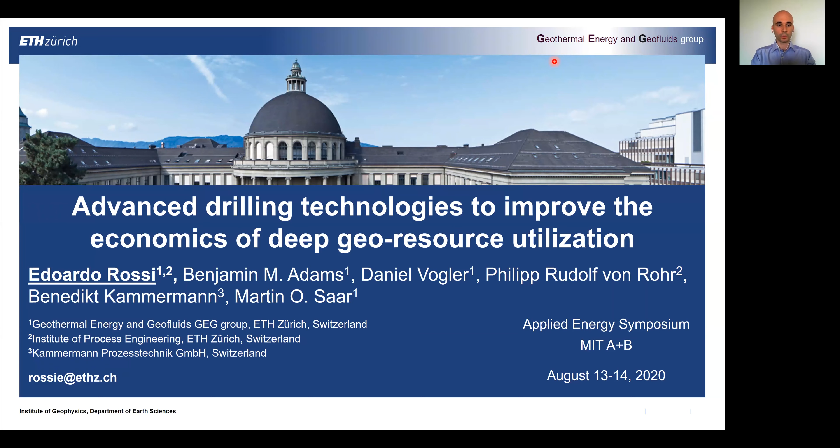Hello and welcome everyone. I'm Edoardo Rossi, and in this presentation I'm going to show you our work on two advanced drilling technologies to improve the economics of deep geo-resources.

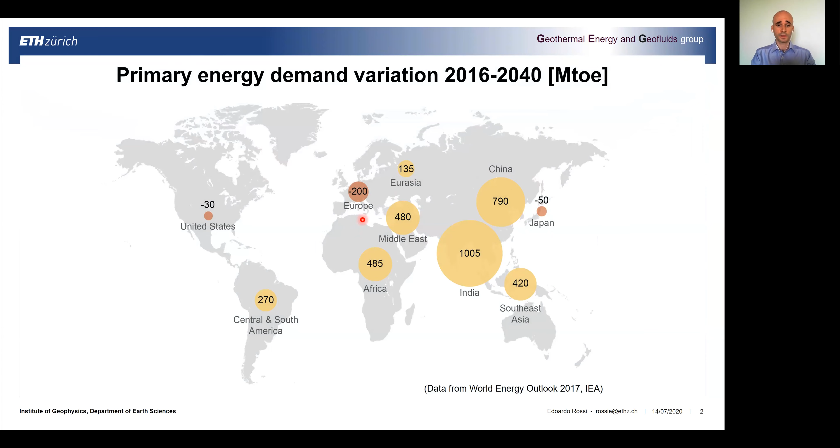Let's start from the background of this research. Looking at the primary energy demand variation in the next 20 years, we can see data from the International Energy Agency showing how, in some developing areas and due to increased world population, there will be an important increase in the energy demanded in the next 20 years.

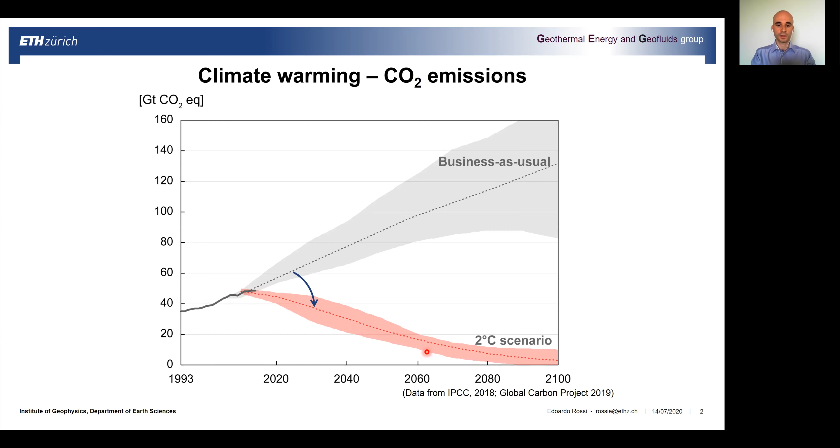Also, a current concern is climate warming. Looking at CO2 emissions, we can see the 2°C scenario from IPCC. If we want to follow this 2°C scenario, we need to decrease our CO2 emissions in the atmosphere and go towards a zero value by 2100.

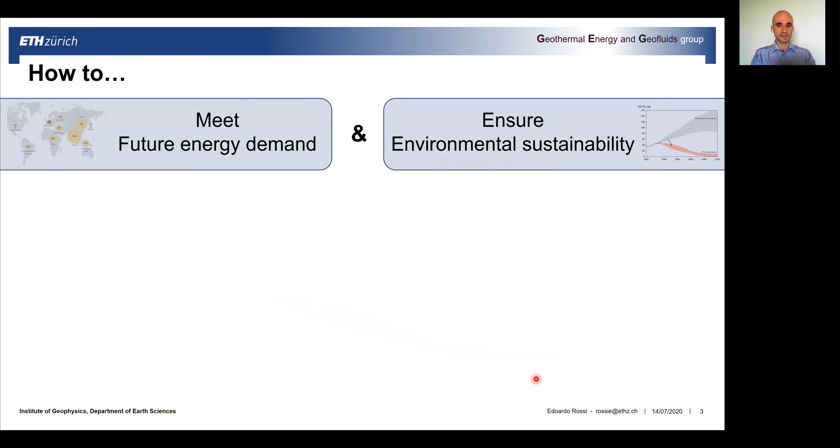If we want to combine and couple these two issues, we understand that we need to find a solution that can increase our future energy supply and at the same time ensure environmental sustainability. Therefore, many countries around the world are proposing and applying energy transition strategies, looking at producing this increased energy generation using renewable energy sources.

Looking at conventional renewable energy sources such as wind, hydropower, and solar energy, there is a huge problem regarding their location and temporal dependency. We cannot produce from these energy sources all around the world, and they also show a short to long-term temporal dependency.

On the other hand, deep geothermal energy, which means using the huge amount of heat stored in the underground of our planet to produce electricity, could provide an interesting solution to increase our future energy supply while also being environmentally friendly.

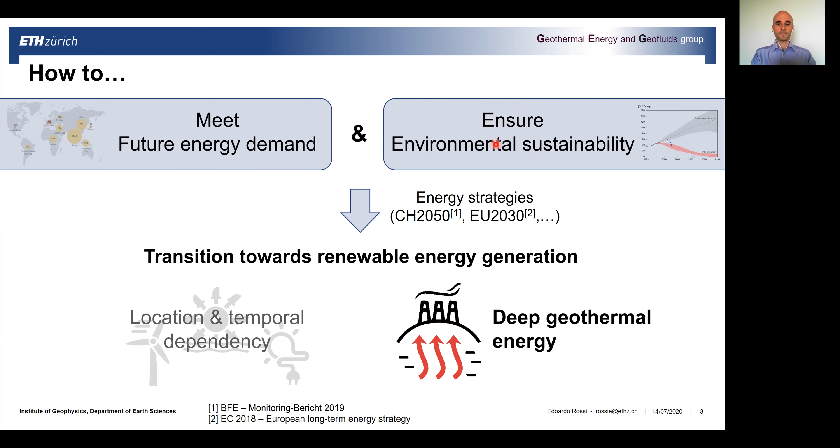One of the most interesting systems using deep geothermal energy is enhanced geothermal systems, or EGS. This system uses the heat found at depths larger than 3 kilometers, generally in low permeability basement rocks such as granite, by circulating a fluid through a hydraulically stimulated or fractured network to extract this heat and, at the surface, produce electricity and/or heat.

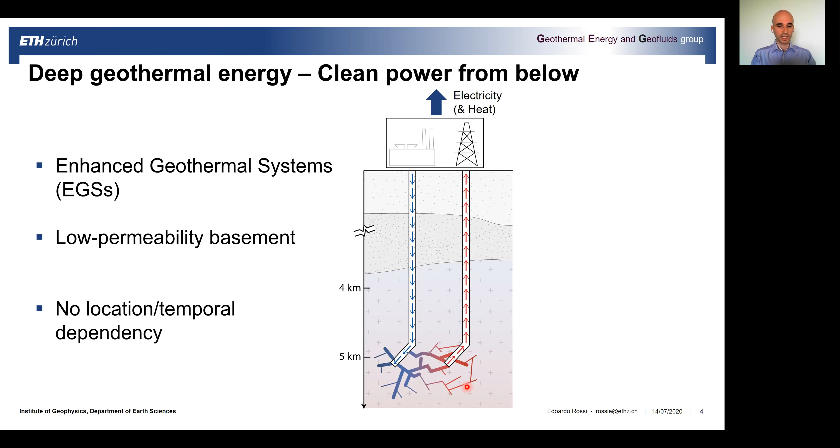Therefore, these systems show no location dependency. As soon as we can construct these deep wells, we can have these systems everywhere in the world, and there is also no temporal dependency. So this system can provide baseload and dispatchable, on-demand power.

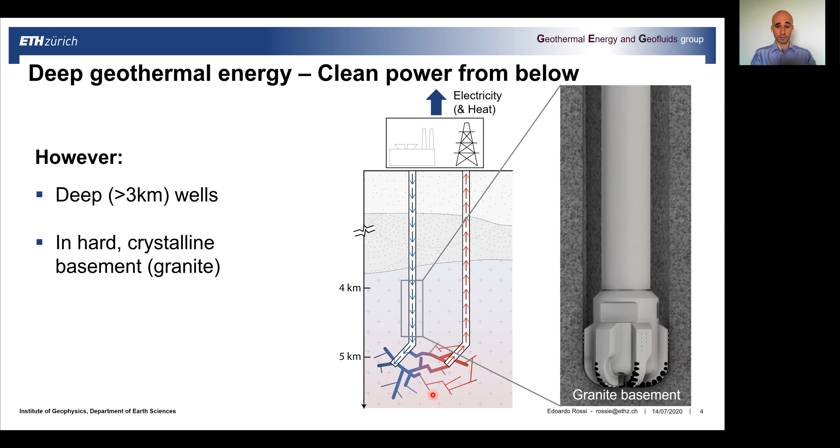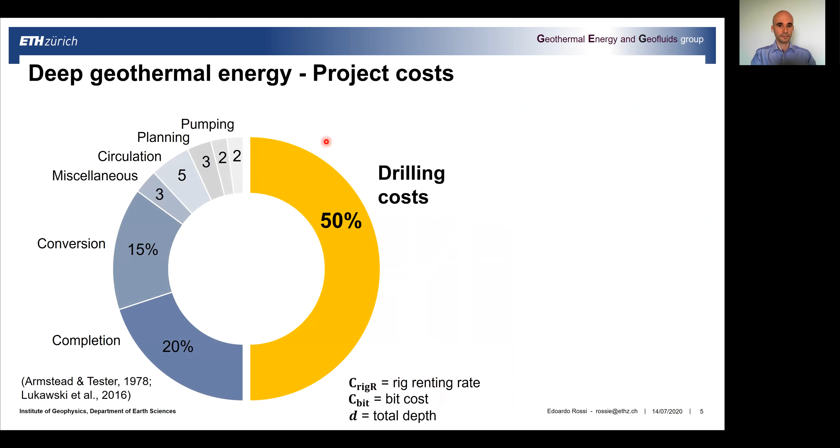However, one of the main challenges of deep geothermal energy is that we need to drill these wells very deeply, deeper than 3 kilometers, generally in crystalline basement rocks such as granite. This is a huge problem for conventional state-of-the-art mechanical drilling methods, because they show poor drilling performance in these rocks. If you look at the project cost for a deep geothermal energy project, the drilling costs account for at least 50% of the overall project costs.

Looking at a simplified formulation for the drilling costs, we see two main parameters: the time to drill and the time to trip. Time to drill is inversely proportional to the drilling speed, or rate of penetration (ROP). The faster we can drill, the smaller the time to drill, and therefore we can decrease the drilling costs.

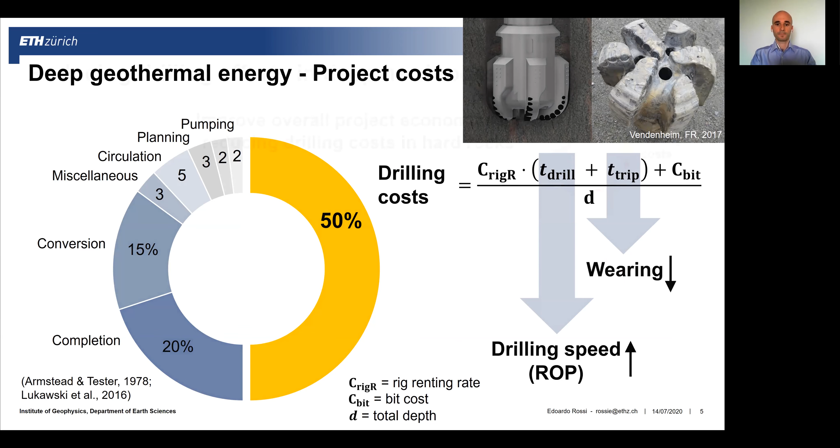At the same time, the smaller the wearing of the bit, the lower the time to trip, and therefore the drilling cost will be decreased. We understand that we need a drilling solution that can provide faster penetration and lower wearing of the bit, improving the economic viability of geothermal energy. Therefore, many researchers and research groups around the world are trying to develop and propose new technologies to improve drilling performance in deep hard rocks.

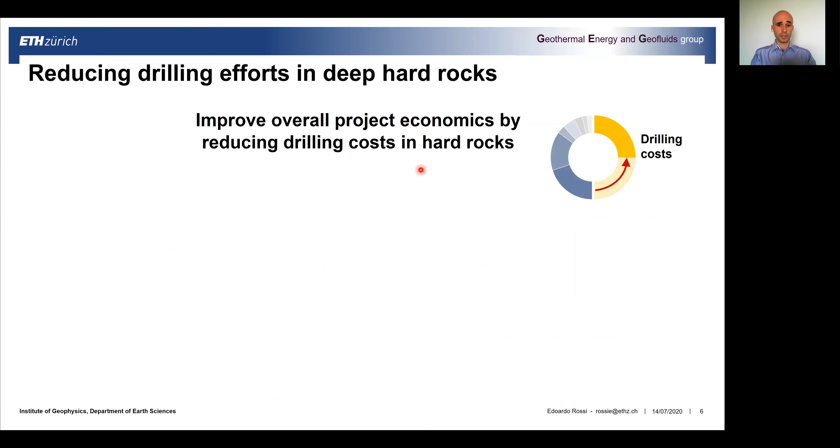At ETH Zurich, we are studying and investigating two advanced drilling technologies: combined thermomechanical drilling (CTMD), and another technology called plasma pulse for geo drilling (PPGD). In the next slides, I'm going to present these two technologies, their concepts, and the numerical and experimental results that we have.

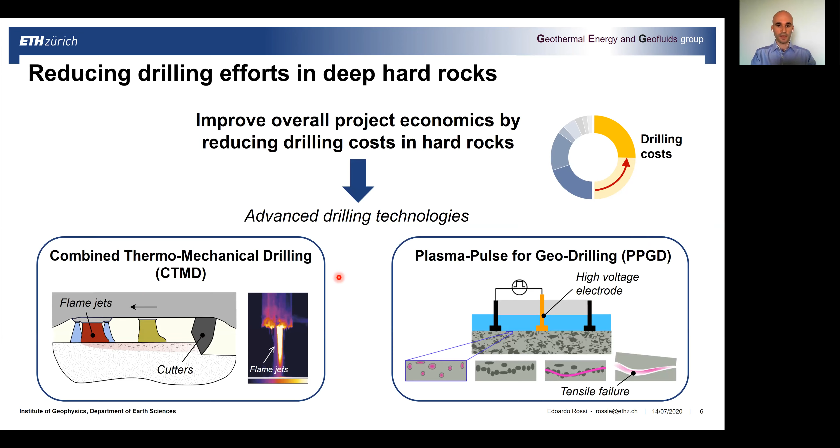Let's start with combined thermomechanical drilling. I'm going to show you the concept of this technology and also some results and performance parameters. The concept of combined thermomechanical drilling is a hybrid drilling technology because it uses thermal assistance, done by flame jetting the material.

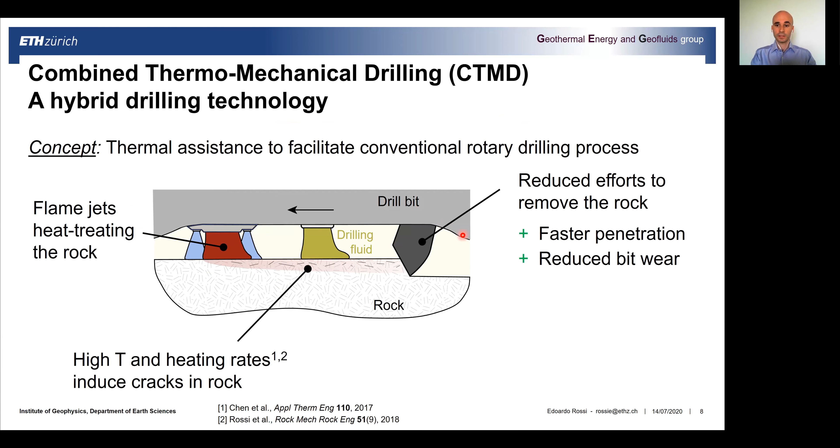These facilitate conventional rotary drilling because the flame jet induces high temperatures and high heating rates on the rock material, causing cracks in the rock. This weakened rock can be removed with reduced effort by conventional drilling cutters, allowing faster penetration and reduced drill bit wear.

And as I mentioned before, this will therefore improve the economics of deep geo-resources.

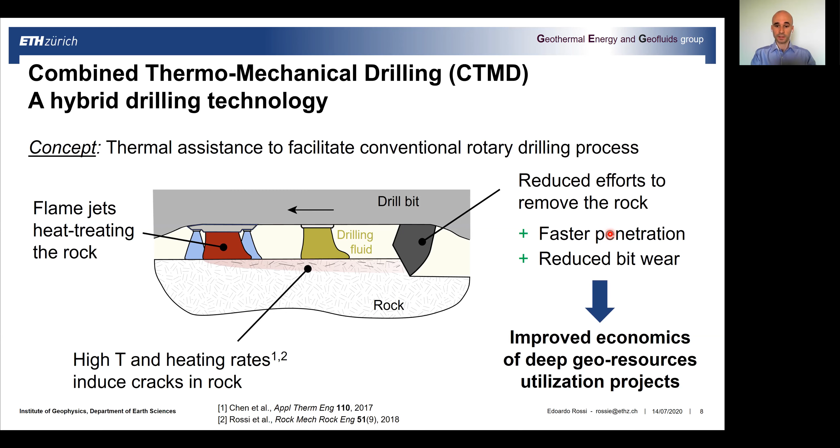After performing many experiments in the lab and developing the prototype of CTMD technology, we also went into the field. We performed a field test in collaboration with the GeothermieZentrum Bochum, using the drilling rig shown here with our CTMD prototype drill bit, on a granite rock sample buried in the ground. We measured many parameters during the test to evaluate the performance of this technology.

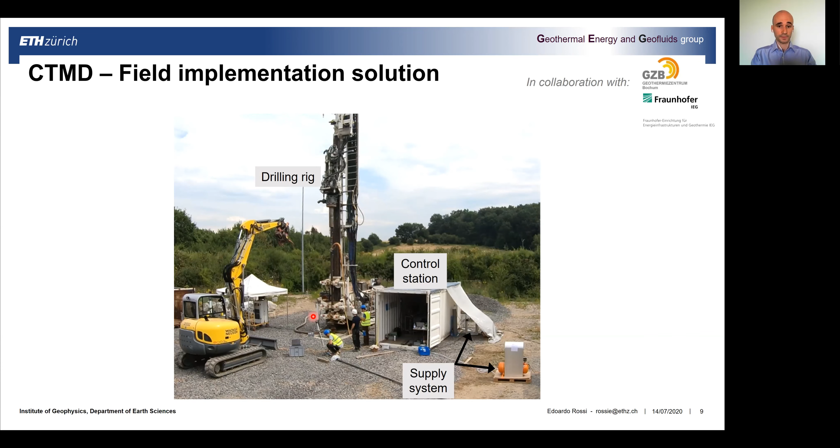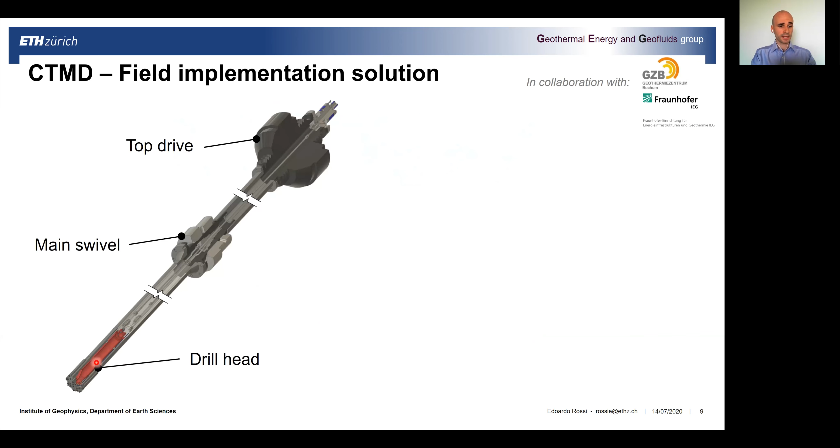This is a drawing of our prototype. The most important part is the drill head at the bottom, where in red we have the combustion chamber, which is used to generate the flame jet that is conveyed down to the hybrid bit face.

At the hybrid bit face, we have the flame jet nozzles, these four, where the flame jet comes out. This whole component rotates, so the conventional drill bits can remove the rock much more easily. We also have drilling fluids, water, to transport the cuttings.

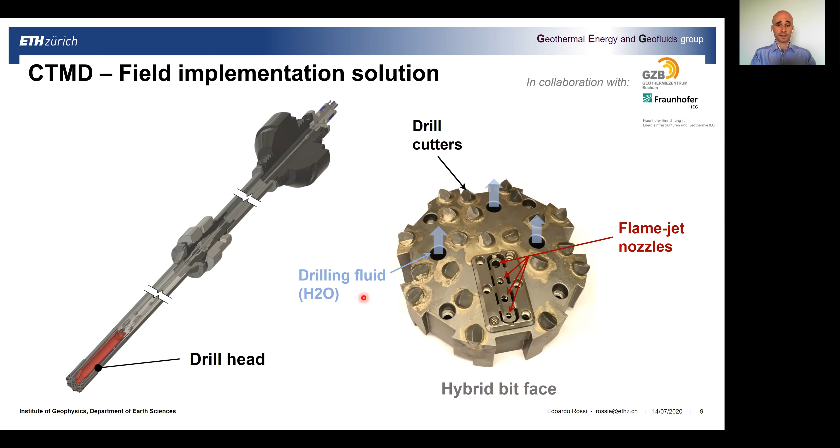Let's take a look at the results of this field test. What we want to do is compare conventional drilling, only mechanical drilling, with our technology. So we just switch on the flame and see what happens concerning penetration in the rock.

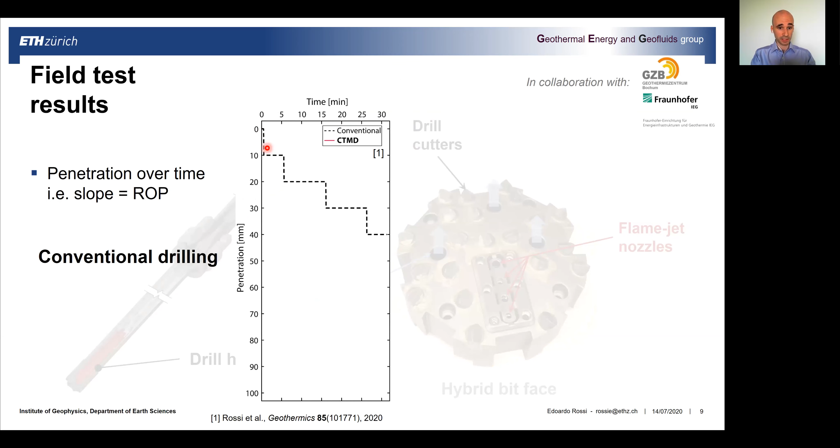When we turn on the flame, we can see here in red the curve for the penetration using our CTMD novel technology, and we can see how the penetration can be improved by a factor of 3 compared to conventional drilling. The slope of this curve represents the drilling speed.

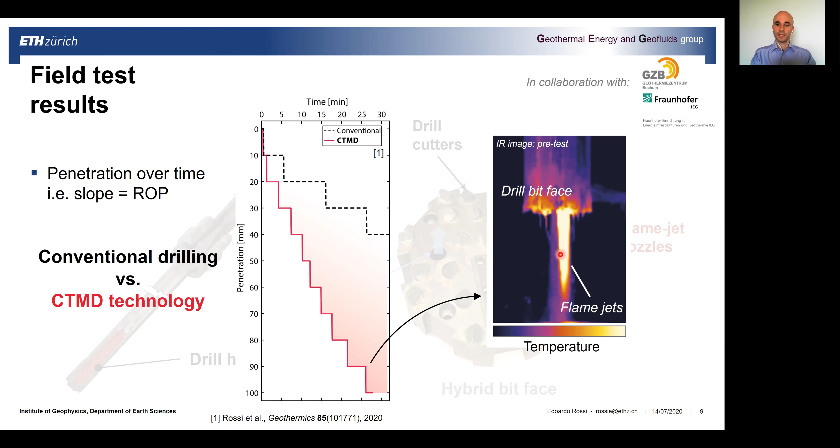Here from an infrared camera image, I'm showing the flame jet coming out from the drill bit before the test. Then this component is lowered and the test is performed.

Let's sum up these results from the field test and calculate some performance parameters: rate of penetration, ROP, and a measure for the bit lifetime, the wearing of the bit. For rate of penetration, we compare conventional drilling, state-of-the-art, with our novel technology, CTMD. From the field test, we found an increase in penetration by a factor of almost 3.

For the specific wear, which is inversely proportional to bit lifetime, we can again compare conventional drilling with our technology, and we see that we can improve the bit lifetime by a factor of 2.5 when we switch on the flame. So thermally assisted drilling can perform much better in this hard granite rock.

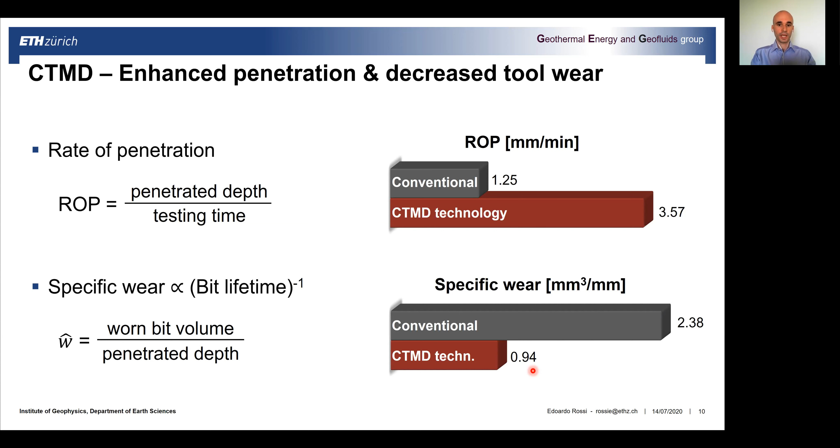Okay, let's now move to the other technology: plasma pulse for geodrilling, PPGD. This is a completely different technology. I'm going to show you the concept behind it and also some first results.

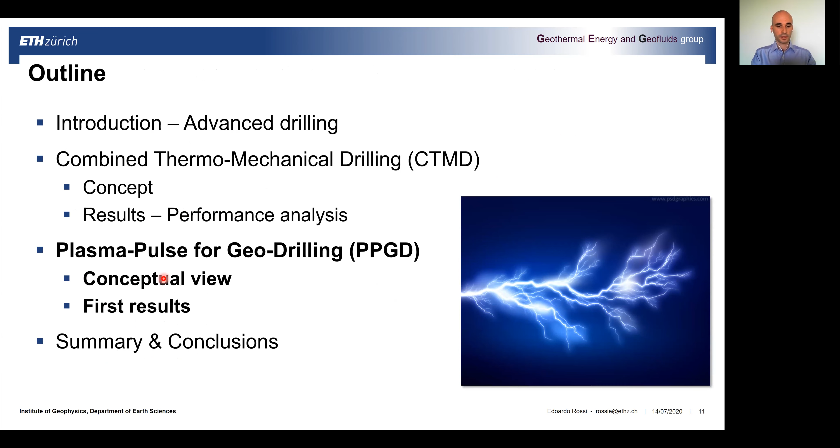The concept of PPGD is based on having electric discharge within the rock, which will break the rock by tensile fractures. These are electrodes placed on top of the rock surface, so there is no contact or mechanical removal, and therefore it is also called a contactless approach.

This means we have no tool wear whatsoever. The drilling tool will practically have no wear. It is also an energy efficient process, because we break the rock by tensile fracturing, which is much more efficient compared to compressive stresses.

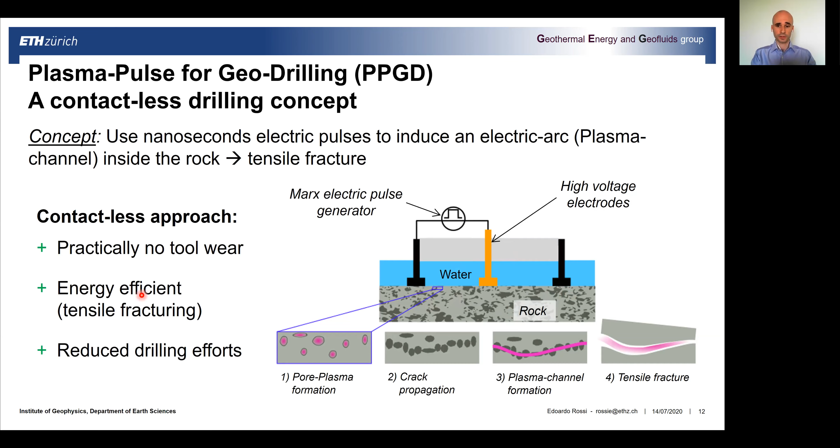And therefore we can say that we have reduced drilling efforts due to the above mentioned factors. So we now show here some numerical modeling of electropulse drilling.

What we do here is place a slab of rock between two electrodes and apply a potential between them. We want to study the damage mechanism during PPGD, what happens when we apply this potential in the rock, and also study the influence of different parameters.

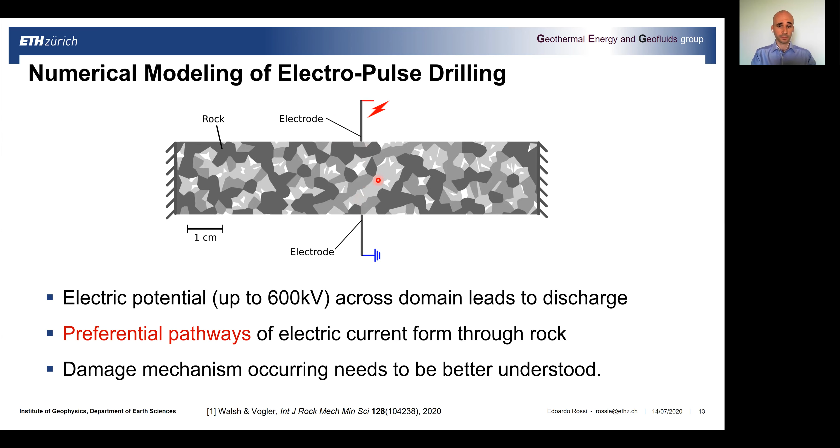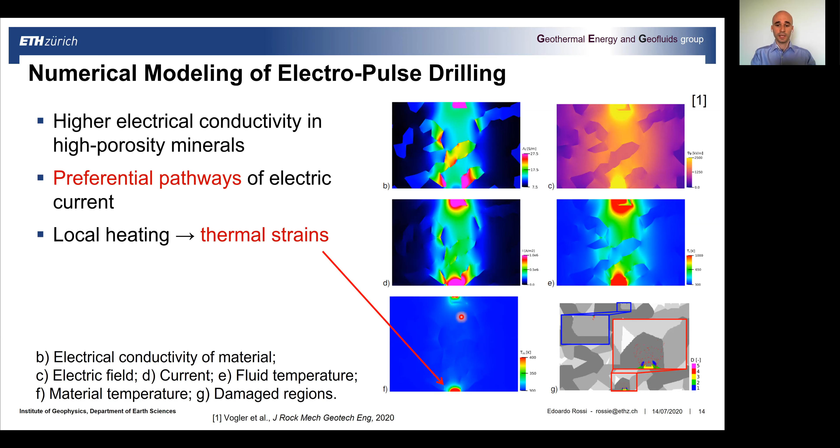The numerical results are shown here. As we can see, high electrical conductivity values are shown for high porosity minerals, and this causes preferential pathways for the electric current. This is also responsible for localized heating in the rock, as you can see in the temperature field, and therefore thermal strains are induced.

These thermal strains are localized, and damage is formed, as you can see in this figure. We also compare different materials: granite, with a much coarser grain size distribution, and granodiorite, which is much finer. We can see that the finer the grain size, the better the fragmentation using PPGD, because of the more localization of the thermal strains.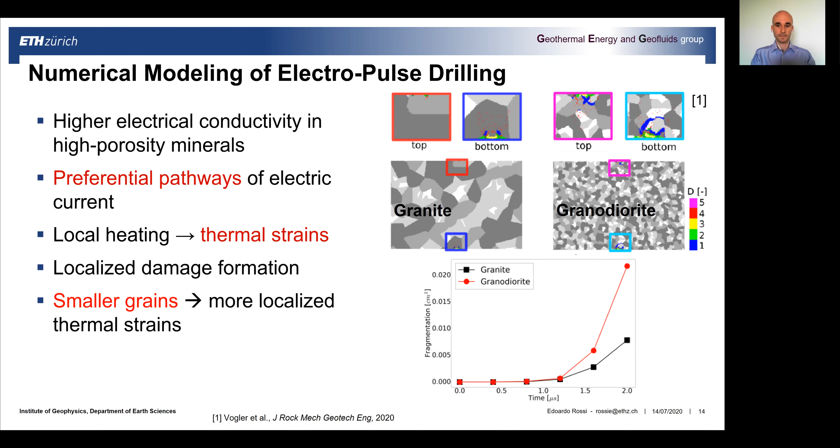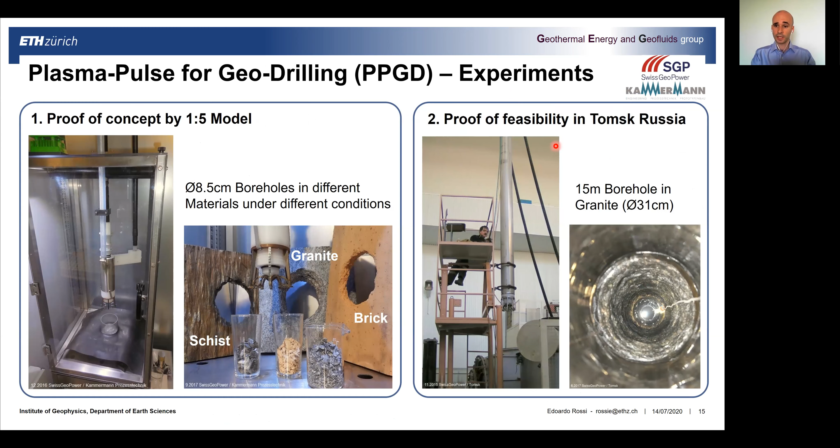After this, we want to use this numerical model to study different reservoir conditions for PPGD. Experiments have also been carried out as a proof of concept of the PPGD drill bit model in the lab, where different materials have been drilled using this technology, such as schist, granite, and brick. A proof of feasibility of PPGD technology has also been carried out in Russia, and under realistic conditions a 15-meter borehole in granite has been drilled.

Nowadays, the parameter optimization in the Swiss PPGD experimental facility is going on, where different rock types are being drilled and different conditions are being tested.

I can show you some preliminary results with demineralized water for PPGD. As you can see here, the ROP, rate of penetration, the drilling speed, is a little bit higher than 7 meters per hour, which is very interesting compared to a value of 1 to 4 meters per hour for conventional mechanical drilling in these granite rocks. The drilling energy here is a measure for the efficiency of the process.

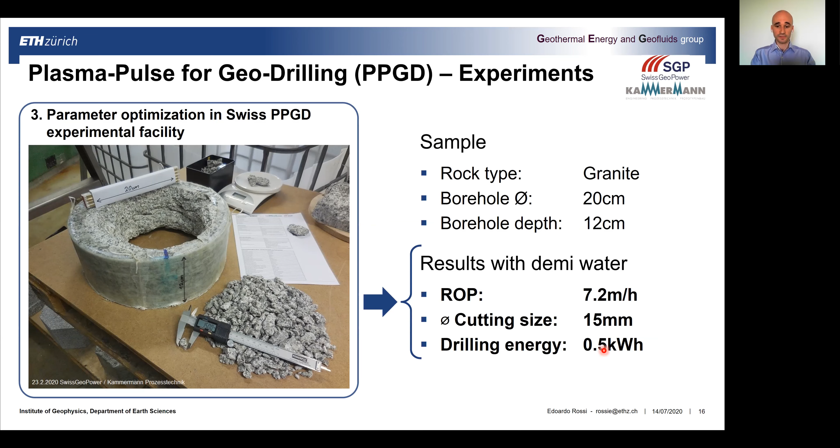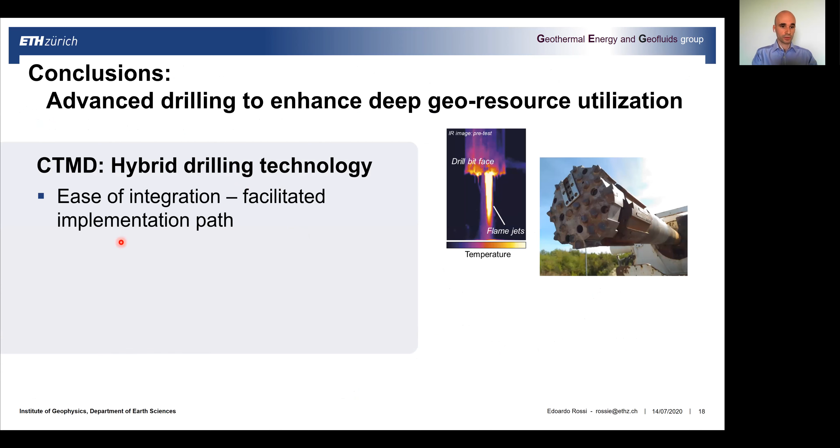Now let's sum up what I just showed you and conclude on the two drilling methods. For CTMD, this is a hybrid drilling technology, meaning we are combining thermal assistance, flame jets, with conventional rotary drilling. We can envision an easier, facilitated implementation path due to the synergies we have with conventional drilling.

We could also profit from the established know-how in the drilling industry, so the technology can develop further using the know-how already out there for conventional drilling systems. As I showed, the drilling performance using CTMD is enhanced by a factor of 3 regarding drilling speed, and the bit lifetime can be improved by a factor of 2.5.

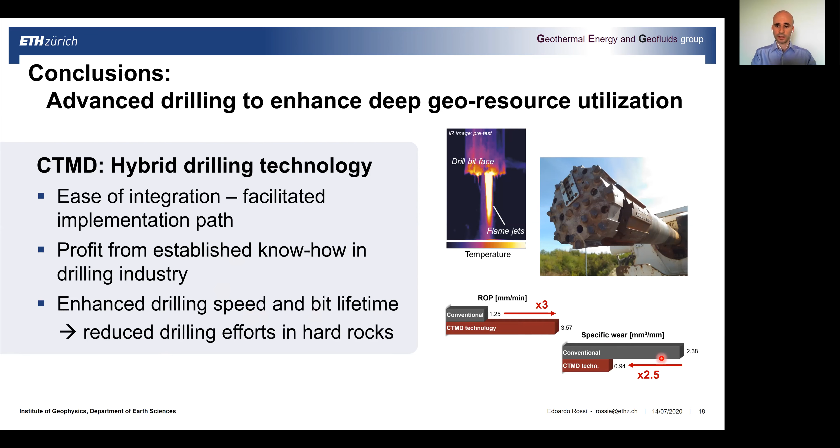For PPGD, we want to drill the rock using fast electric pulses inside the material, and from numerical modeling we could show the influence of different minerals and micropores. As you can see from this picture, fluid salinity also has an important impact on the fragmentation, and on the temperature field, which is much more important when the fluid salinity is higher in the rock.

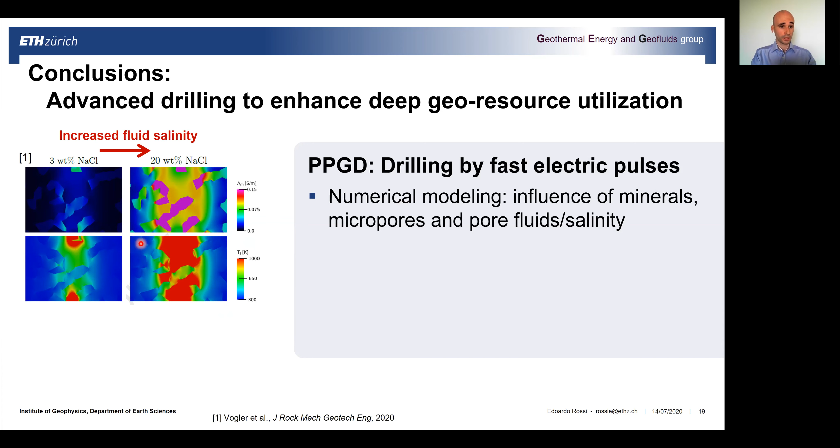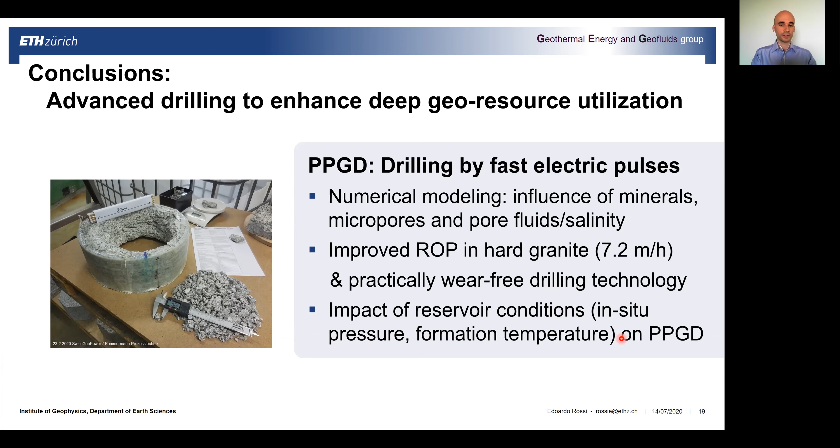From experiments and field tests, we have seen an improved rate of penetration, improved drilling speed, in hard granite, with a value of more than 7 meters per hour. This technology features practically no wearing of the drilling tools, which is very interesting for hard rock drilling. The next step is to study the impact of reservoir conditions, in situ pressure and formation temperature, on the PPGD technology. This is the end of my presentation.